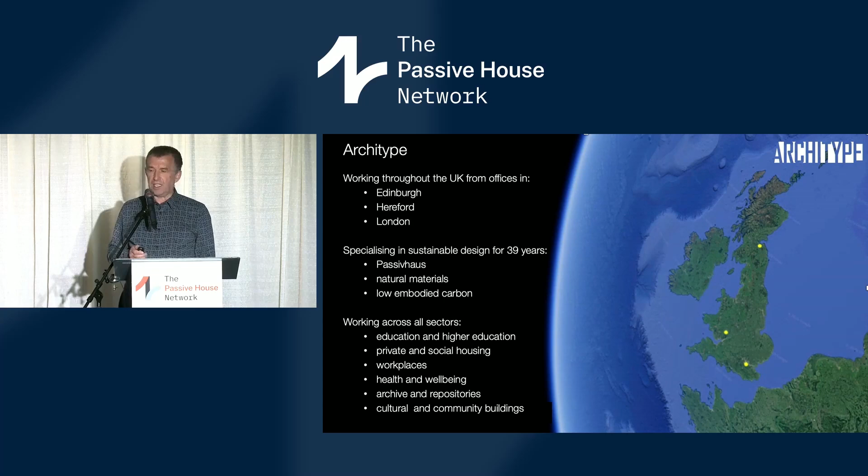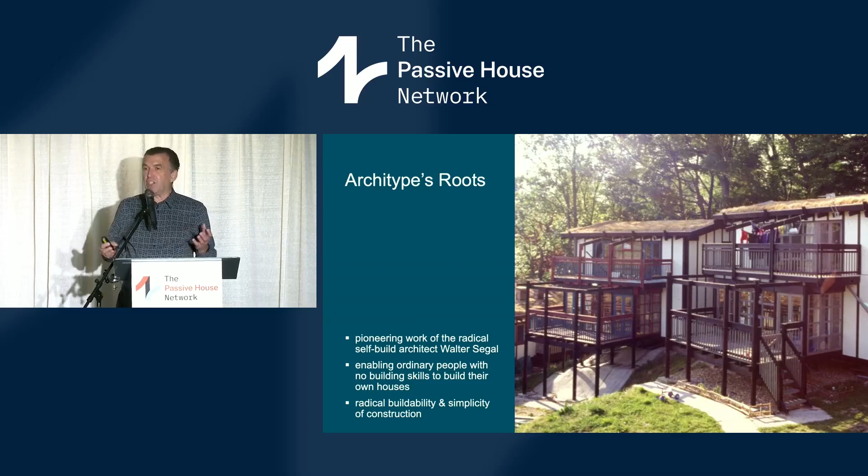So I'm going to take you back to the roots of Architype. We actually grew out of the pioneering work of the Swiss architect Walter Segal, who developed a really radical way of building, which enabled ordinary people to build their own houses without any previous building skills. And it was that sort of buildability and simplicity of construction which I think has underpinned everything that Architype's done and has enabled us to achieve Passive House at sort of economic costs. And I'll talk more about buildability and simplicity.

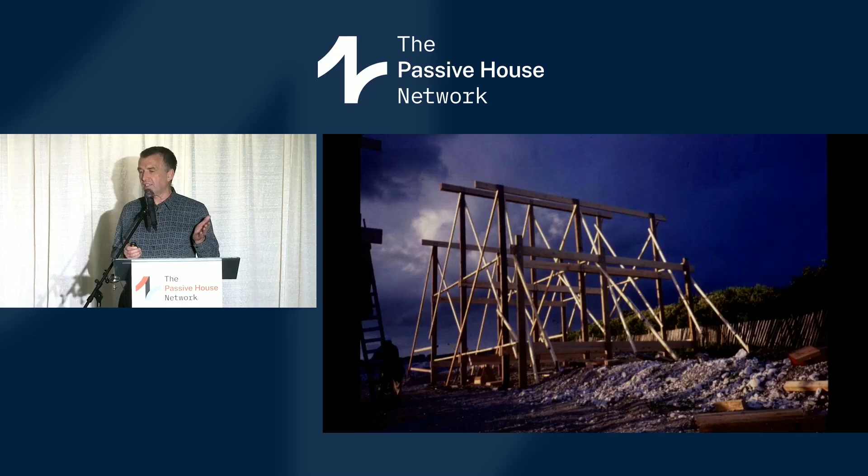But it was a really radical, simple way of building where if you can learn to measure, drill and cut and put a bit of effort into it, then you can build your own house as a group of people. Really inspiring for me as a young architect in the early days of Architype to be working with people self-building their own houses to incredible quality and standards.

And for me as a young architect, it was a really humbling experience to realise that you couldn't just do a drawing and pass it to a builder and expect it to be done right. And if it wasn't, you couldn't just tell them to redo it, because the self-builder would turn around and say, well, I don't understand your drawing, show me what to do. And you realised you really had to begin to understand not just what you wanted, but really how it could be built.

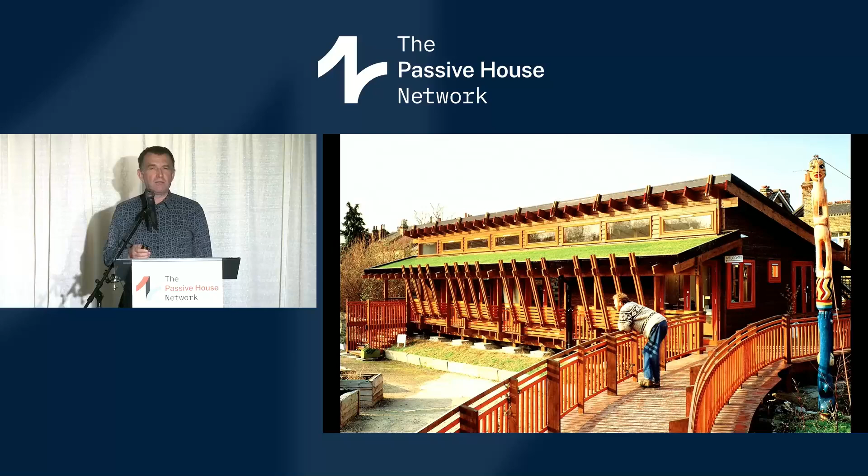Then one of my very first buildings in 1991 was this little visitor centre for a wildlife organisation in London. And they wanted a Segal-type timber construction. They had a very, very tight, small budget, and they wanted a building to be as sustainable as it possibly could. And I'm really grateful to them because it forced us to think really hard about what we could spend the money on.

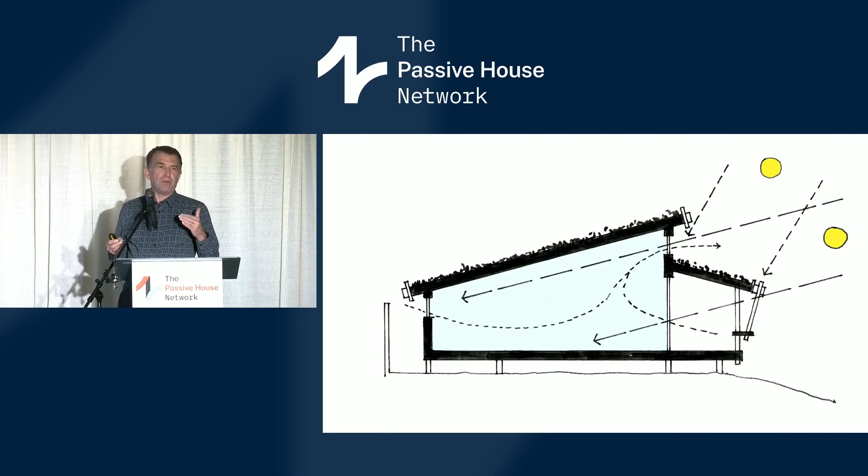Keep the building really simple, make the shape and the form and the orientation of the building do all the hard work to moderate its climate without the need for complicated M&E systems and all the kit that was normally put into buildings. So we had a very simple building with a roof tipped up to the south, a veranda to shade out the sun that would overheat it, and then very simple natural ventilation where we could open high-level and low-level windows to cool the building in the summer, but gain maximum warmth from the sun in winter when it would be useful. So this was a really, really simple building.

It was the very first building in the UK to use recycled newspaper insulation, using a sort of breathing construction, organic paints imported especially from Germany for the project itself. But most importantly, a really simple shaped building, thinking about its form and orientation, to do all the hard work in environmentally controlling itself. And again, that runs through our approach all the way through.

So I'm next going to show you three key projects that we did between 1995 and 2005, which really took us from where we started through to discovering Passive House and then embracing it.

The first is a building we were asked to design for the Horniman Museum, a really amazing place in South London. They had this old tennis court site next to their museum building where they wanted a demonstration building, called the Centre for Understanding the Environment. They'd seen our Segal buildings like the one I just showed you, and wanted something similar but on a much bigger scale, that could operate automatically without needing people to open and shut windows and all the security that went with that. They wanted it automated, but simple and efficient.

So we took the idea of that post and beam simple timber construction, but scaled it up to a huge scale, where the columns and beams would not only hold up the building but also act as a passive ventilation system, drawing cool air from underneath the building, up and out through the column chimneys at the top. It could all be controlled with a simple building management system.

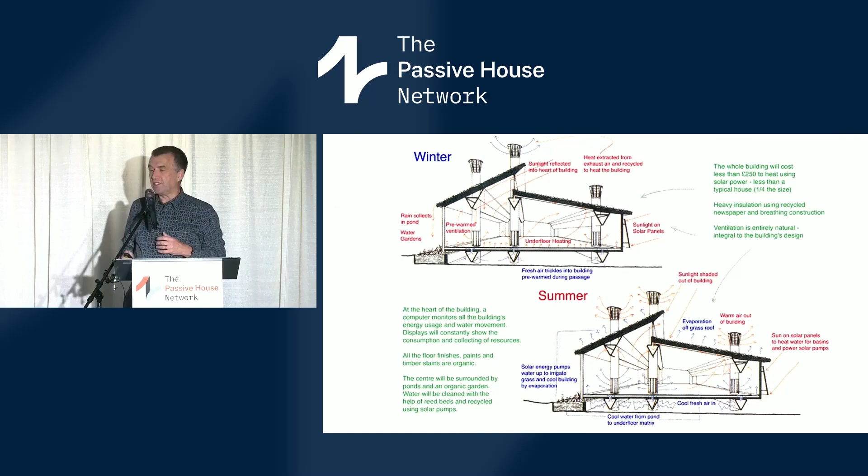The other thing this did was enable us to integrate services with structure and prefabrication, because the building had to be built incredibly quickly, in 8 weeks from when they had the site available to opening. They also wanted a building that could be moved to another site in future, since they saw this as a temporary installation. So we had to design something highly sustainable, quick to build, and movable. We came up with this idea of a big prefabricated structure that also acted as the services. It was probably the most stressful 8 weeks of my life getting this thing built, but we managed it.

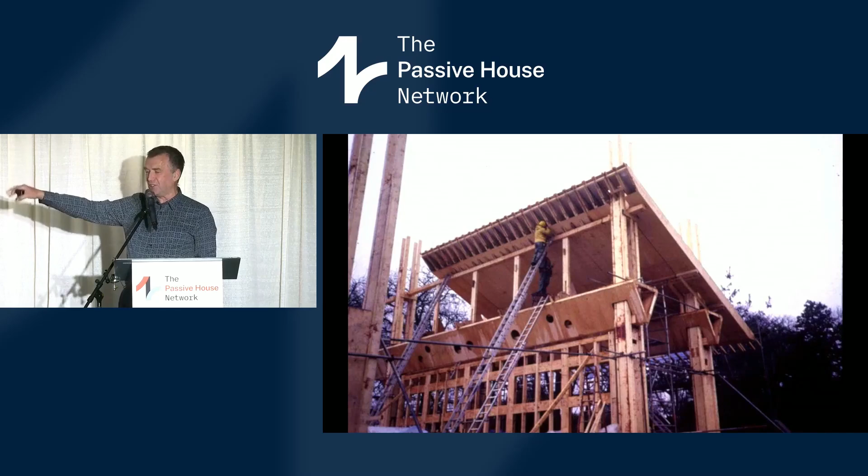Health and safety - don't look at this guy on the top of the ladder there, or the other guy just behind him on a little bench on top. Anyway, there were no accidents in the construction of this building, and it was up and running and opened in 8 weeks. I'm showing it to you because for me it was a really seminal building where we were thinking about form and orientation, but integrating it with structure and services. Nowhere near Passive House - it was definitely a key building on our journey towards it, that type of integrated thinking.

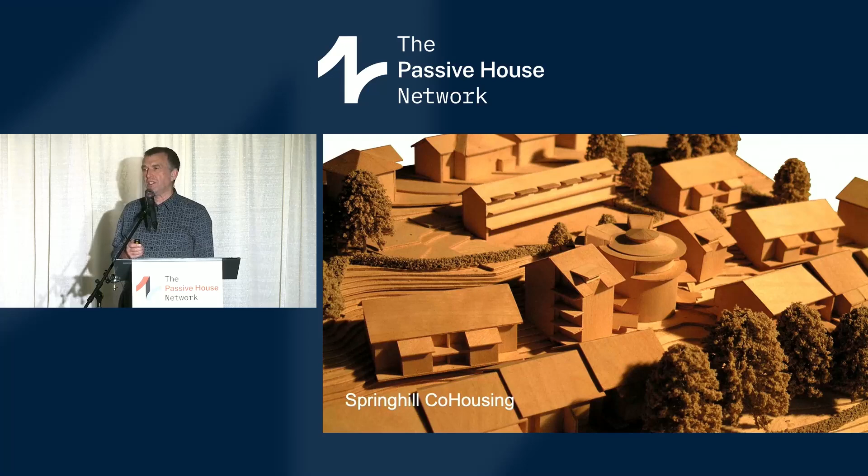The next project is a co-housing scheme, which I'm showing you because it really brings to the fore the social side of our work, the importance of working with communities and taking communities with you. I know there's been quite a few co-housing schemes here in the US, but we discovered it from people in Denmark, where it's very popular. The idea is, rather than a social housing provider building houses to rent, or a developer building houses for sale, the people who are actually going to live on the site form their own development company, employ architects, raise money, and build out the project.

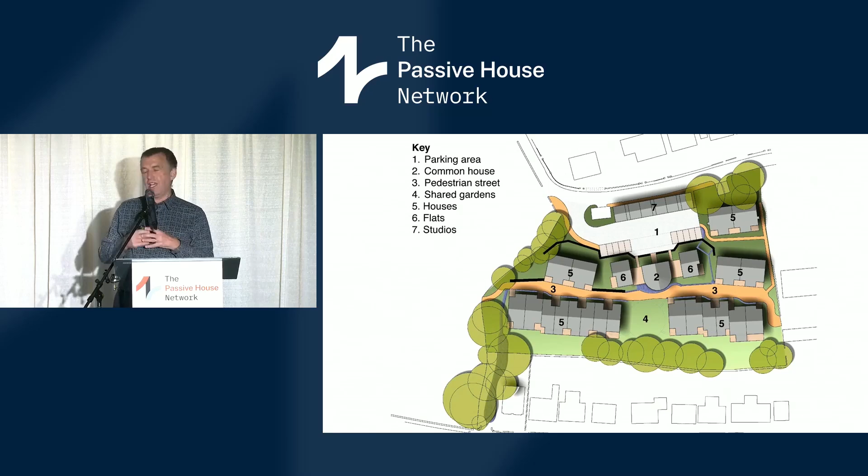What's really interesting is that they demanded high standards of sustainability - they wanted low energy houses. It wasn't about persuading a developer; they were the developer, telling us that's what they wanted. But importantly, they also wanted a scheme that was highly social. So instead of all the houses on separate plots, they wanted shared gardens that they all shared together. They wanted a common house at the heart of the scheme with communal facilities, creating a character of living which is vibrant, with cars kept away from the site.

It's all pedestrian - the children are completely safe and can play anywhere. The gardens have private areas, but they're open communally. They own the whole site as a group, then leasehold their individual houses. It's a remarkable process of working with ordinary people to build a very special place. But the message here is working with communities - when you open up to people, they demand sustainability in a way that politicians, professionals, and developers often don't.

The third key project is St Luke's Primary School, which was a key step in our journey towards Passive House, because here we really focused on improved insulation, getting rid of thermal bridges, improving air tightness, and triple glazed windows. But we were still big believers in natural ventilation, and we didn't like the idea of mechanical ventilation.

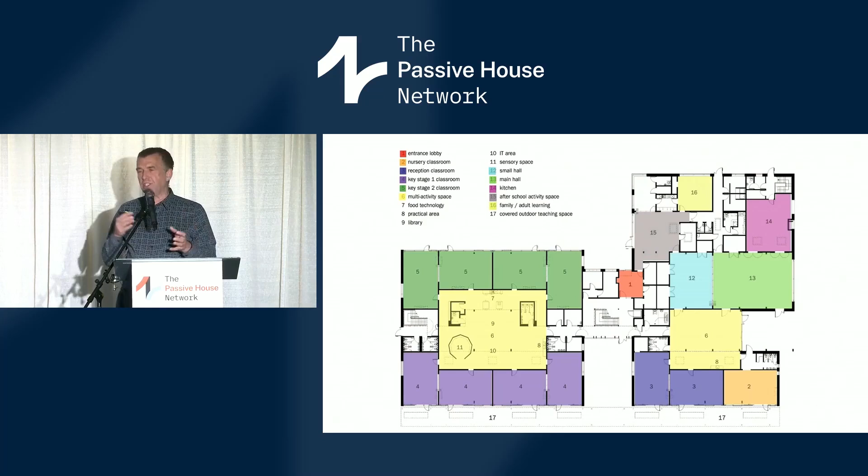But again, it brought together for us the social side and the environmental side, because we rethought what a school is and moved away from corridors and classrooms, creating shared spaces off which classrooms opened. This very much came out of consultation with the school, in a very deprived part of Wolverhampton City, where they wanted to create a place where children could learn and develop.

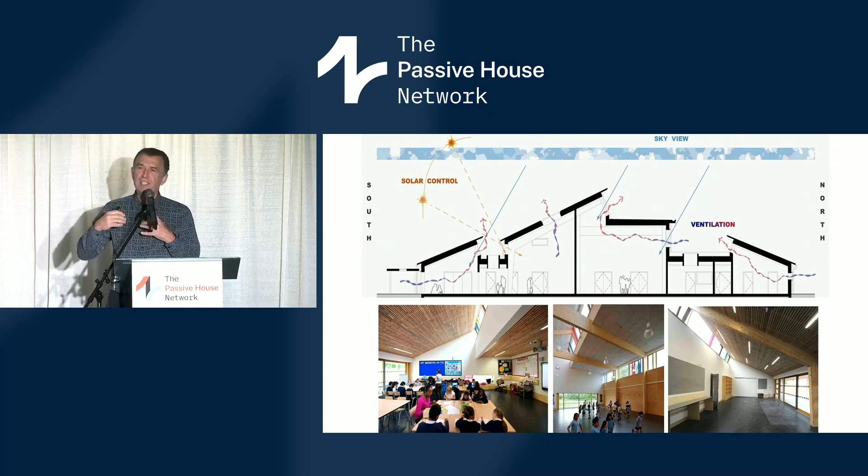To fulfil their potential, not just by sitting in rows in classrooms, but by collaborating in groups and different activities. So we developed a very interesting section running through the entire shape of the building, creating a series of different spaces which would bring daylight into the heart of every space, allow natural ventilation through every space, and bring a school to life, with real focus on the quality of natural materials that children would touch and feel, and the quality of light and air in the building.

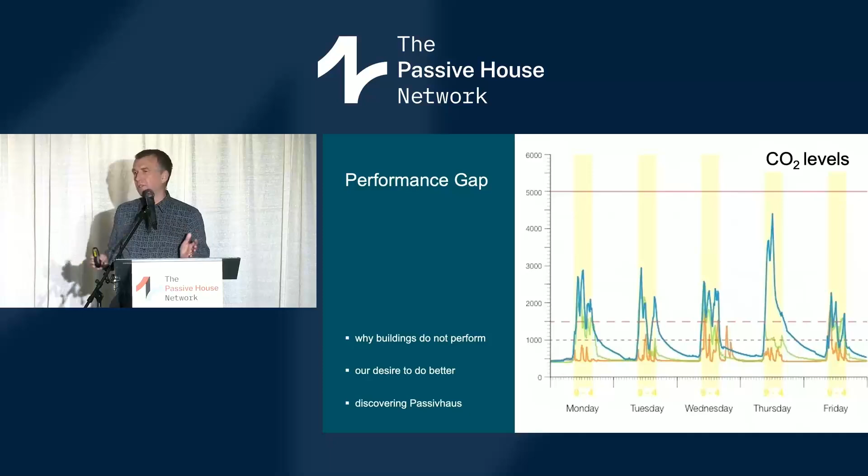It was a very, very successful building in many ways. However, we then did post-occupancy monitoring, and people loved this building, and it works very well, everybody thought, in many ways. But we had heard about the performance gap, and we wanted to test our own buildings rather than just believe that they were good enough.

And when we did this, we were horrified to see the CO2 levels we were getting in the classrooms. The three colours: blue is winter, green is autumn or spring, and orange is summer. In summer it's not too bad, because the windows can be wide open. But in winter we were getting CO2 peaking at 3,000 to 4,000 or 5,000 parts per million, which is truly horrendous. We were horrified to discover this, but actually it's not uncommon, and it's not as bad as some other schools we also monitored, of all ages, new and old, often getting above 5,000. It's extraordinary to realise how bad the air often is in our buildings.

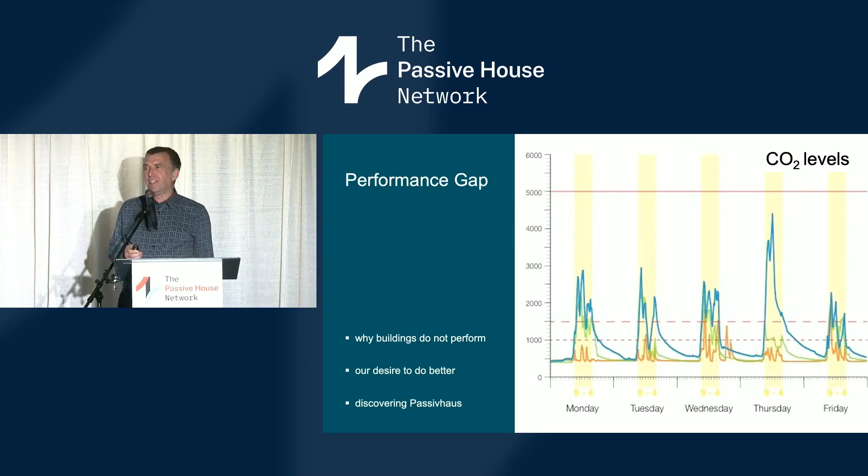So we determined to find a solution, and it coincided with a time when Nick Grant, who some of you know well, one of our close colleagues we work with a lot, had been to the Passive House conference and came back talking to us about this standard. He was very sceptical about it, but discovered it actually worked. We didn't really believe him either, but started to look into it, and the more we looked into it, the more we realised it offered a solution.

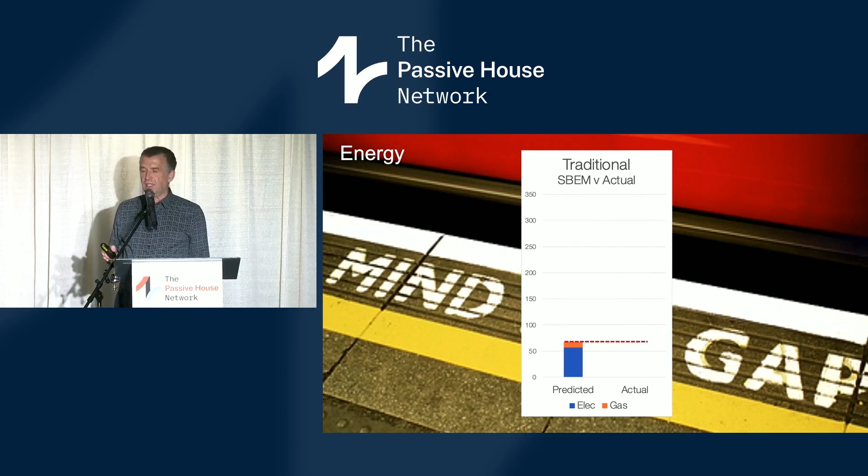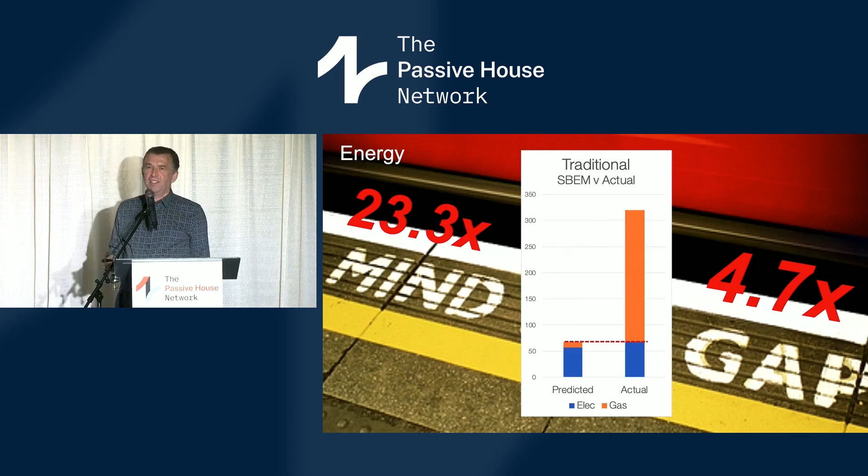When you look at how big the gap in performance is, it's extraordinary. This is data we've used over many years to convince people subsequently about why Passive House. SBEM is the modelling used for building regulations for non-domestic energy predictions in the UK. This is a secondary school in the city of Edinburgh: what they predicted at building code stage versus what was actually measured in reality. An extraordinary 4.7 times as much energy, and the gas 23 times higher. That's just an order of magnitude of error, which is extraordinary, but not uncommon.

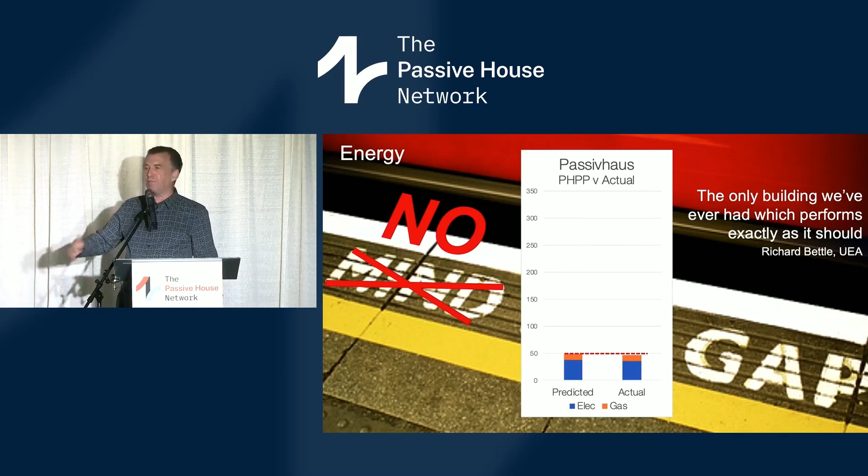Then one of our own Passive House buildings, built years later, predicted in PHPP what was actually achieved, year on year on year. Our client at this building, a university, said this is the only building we've ever had which performs exactly as it should. Surely every client should expect every building to perform as it should. If we bought a new car and it did 10 miles per gallon when it should do 60, or the air conditioning went hot when you wanted it cold, you'd take it back. But buildings do that all the time. It's quite outrageous and scandalous.

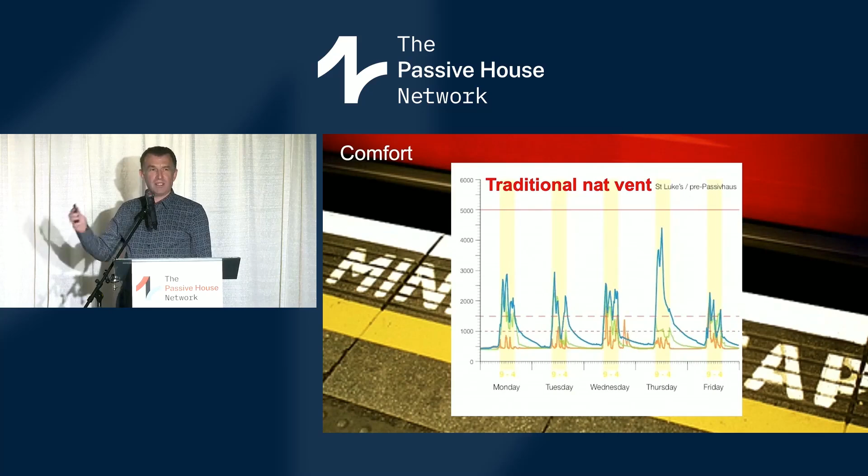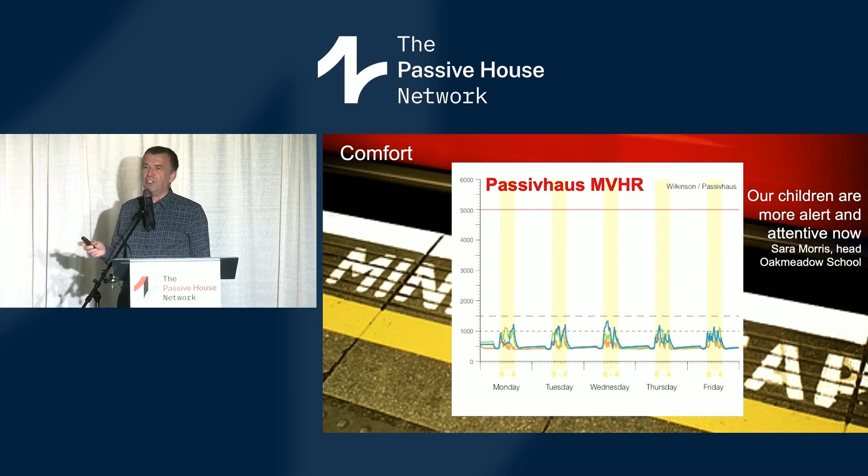Going back to the graph from our primary school, and monitoring a Passive House school we built a few years later next door, you go from that to that in terms of CO2. When the head teacher says our children are more alert and concentrate better, that's what it's all about. Energy is important, of course, but actually it's about children being able to study and concentrate. We can all remember the Friday afternoon English lesson where you struggled to stay awake. You thought it was a boring teacher, it might have been, but it could just as well have been the CO2 was so bad you couldn't possibly stay awake even with the most interesting teacher.

So, Passive House, we quickly became intrigued and converted to the fact that it could offer us a solution to this sort of performance gap that we were horrified to have discovered. I think we were most interested by the fact that it was not just an energy standard, but it was

first and foremost a comfort standard. But underpinning all that being a quality standard, which is what guarantees that it will work. The science is spot on, but the certification and the quality underpinning is really what makes it the difference.

And as an architect, there's nothing else that I've ever had to do in my career where my work is so thoroughly checked externally by an independent person. And then the same for the contractor, to have to gather the evidence is just so different, and it's what

makes it work. So for us, Passive House became something that we knew would guarantee that the building would actually perform as designed. And why, as an architect, would you ever want to design a building which doesn't perform as it's designed? But we do it all the time.

So it's a way of making sure that it does perform. It eliminates the performance gap, which is critical.

It's reducing energy by design rather than, as so many other codes and things do, just offsetting carbon by add-on features and renewables. It's reducing running costs, and in housing, that's reducing fuel poverty, as we call it in the UK.

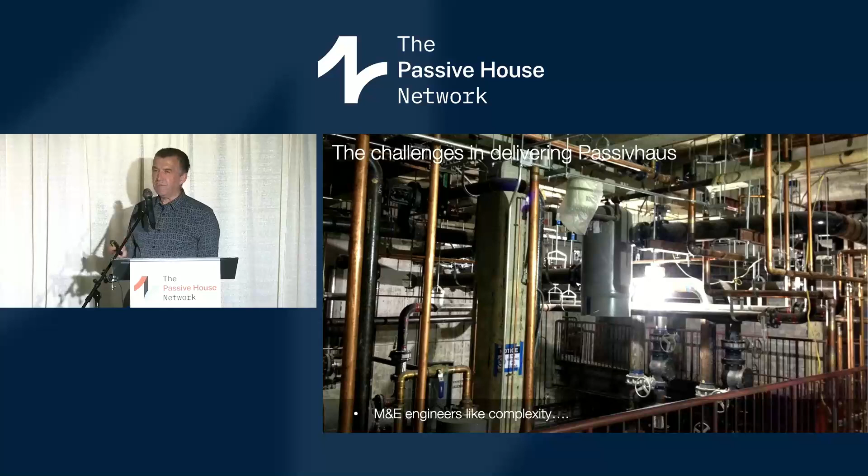And then quantity surveyors, cost consultants, and contractors, they all will price the risk, the perceived risk of something that's new and unknown to them, and you have to overcome that.

So we have to overcome our instincts to design complicated things, and we have to overcome our worry about the risk of something new. But we can do that, and that's what we have to do.

So I love jazz music, and I think this quote from Charlie Mingus really says it all. Making the simple complicated is commonplace. Making the complicated simple, that's creativity.

So making the simple complicated, anybody can do that. Making the complicated simple, that's creativity. And that's what I think we need to do. And that's what Passive House offers us the opportunity to do, encourages us to do that.

So we need to change the culture of how we design. I think too often, I don't know how it works here in the US, but in the UK, design is often a linear process where the architect comes up with a vision, you pass it down the line for the engineer to make it stand up and fix the services, you pass it on to the builder to actually build it. Each person is passing responsibility down the line and not worrying about what's happening.

With Passive House, you have to think in an iterative, cyclical way, so that you think about the form and the orientation, optimize that, develop the facade design and the fabric construction, the MEP services, and then go around again and optimize and refine, and the PHPP helps you do this as you're designing. The whole team needs to work collaboratively together in a cyclical way rather than in a linear way.

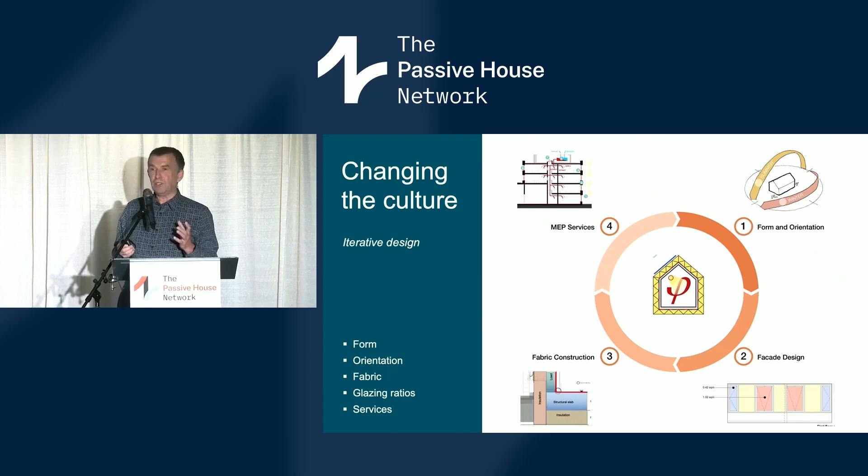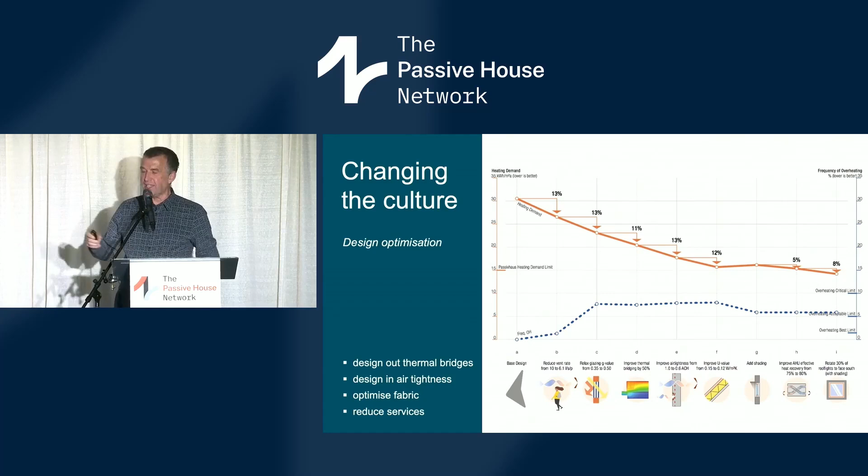As you do that, you start to create a building which is going to work, which is cost effective, and is buildable. You're using the PHPP, as I'm sure you're all aware, to gradually bring the heating demand down from your first effort, which might have been at 30, change this, change that, tweak that, and you gradually get it down to under 15 kilowatt hours per square metre. And at the same time, you're working hard to keep the overheating below limits.

So that's what you do. I'm just going to take you through projects that have helped our business go from our first Passive House in 2012, 10 years later, to 80% of our work is Passive House or Enerphit.

So these are the very first buildings, the schools we did. The client had a standard budget and said, you can do Passive House if you want. They didn't ask for it, we suggested it, but as long as you do it within the budget, and we achieved that. They could see how well it worked, and they came back to us 3 years later and said, our budget's reduced, can you now do a Passive House for a reduced budget? And we did, but with no compromise to the quality of the architecture.

We then did this building for the University of East Anglia, which combined achieving Passive House with BREEAM Outstanding and a really big focus on reducing carbon with thatch cladding and timber construction. It's been open now for 7 years, and every single year its energy has been under 15 kilowatt hours, spot on, performing exactly as it should.

This was the first Passive House secondary school in the UK. It's a much bigger scale building for us, and quite challenging in terms of the complexity of what's required in a secondary school. But again, we managed to achieve this, and a building which does not compromise, I think, on architectural quality by being Passive House at all. In fact, quite the opposite, achieving, in terms of total energy consumption, a 69% reduction on typical benchmarks in the UK.

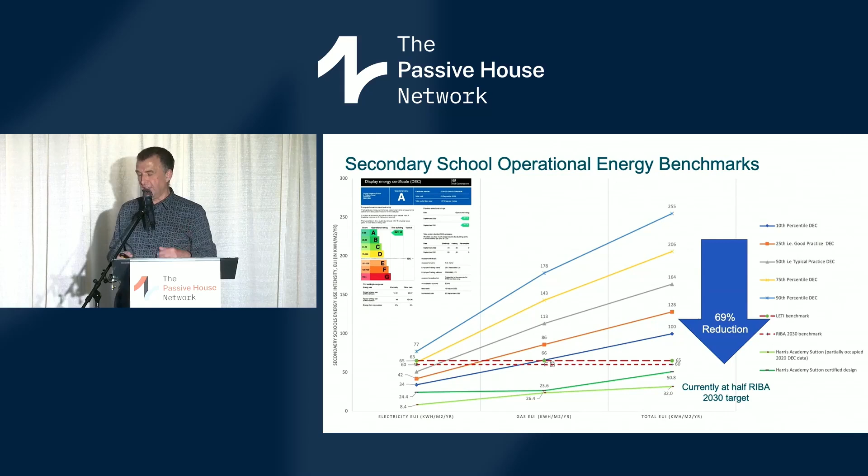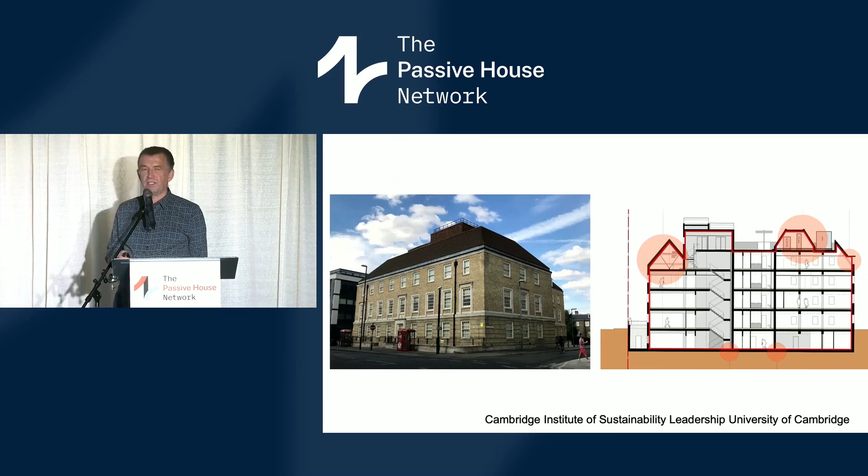That's overall energy consumption. And then we're also now moving into Enerphit. So this is the Cambridge Institute for Sustainability Leadership for the University of Cambridge, an existing 1930s building where they wanted BREEAM Outstanding, Well Gold, Enerphit, and every standard they could possibly think of.

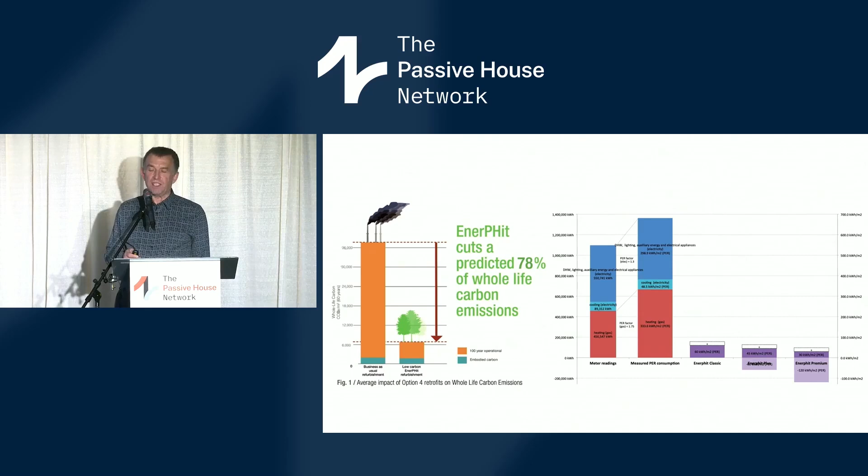It was quite a challenging building to do, but we modeled different options and actually got doing the building to EnerPHit achieving a 78% whole life carbon emissions reduction from business as usual. One of the really interesting things here was the windows, typical sash windows, which are really difficult to make energy efficient, but actually cut out a huge amount of daylight.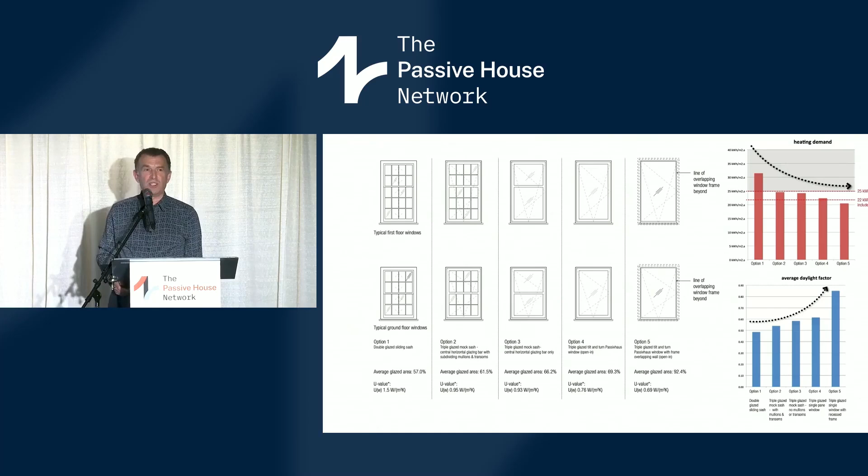So we managed to work very hard to persuade the planning conservation officers, it's a very sensitive architectural area, Cambridge, to go for fully frameless glazing, which was hard work. So you need to dream big and persuade hard. But the big impact there was obviously saving energy, but improving daylight massively. I think the finished building looks really cool having those very, very simple windows set back in the facade there, and the quality of spaces we managed to achieve inside, very good too.

So the next stage in our development was opening an office in Scotland. We didn't do that because Scotland was some passive house mecca, there was very little passive house happening. But we could see there was potential there with the very ambitious targets that Scottish Government were setting for climate policy, really more ambitious than the rest of the UK.

And I then moved there and started talking to people and worked with the Scottish Futures Trust to fund schools in Scotland to develop a mechanism which set an EUI target for all energy and tied it to funding, so that for a local authority to get funding to build a new school in Scotland, you now have to achieve this target every year for 25 years, and you get your funding as a revenue payment each year over 25 years.

So overnight, it meant that any local authority in Scotland wanting to get funding from the government to build a school needed to achieve this. Now, they could achieve it any way they wanted, but actually, we could tell them that passive house would guarantee that they would achieve this, because we'd expect a passive house school to come in at about 50-something, safely, well under that metric.

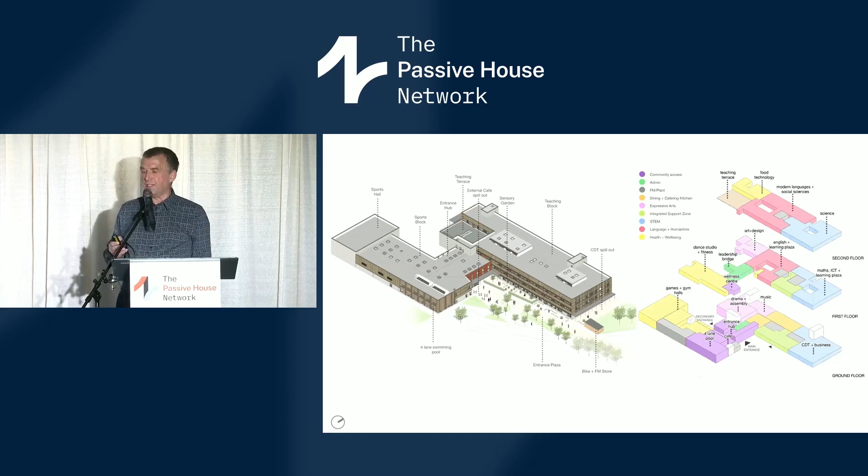It's a big high school, which typically in Scotland also includes lots of community facilities. So it's quite a complex building, a big school of this size, but also has a library and a swimming pool and lots of complexity of layout. And yeah, there's not time to go into all the metrics, but we've got an overall form factor of 1.7. And you can see afterwards all the different levels of insulation and glazing ratios and heating demand.

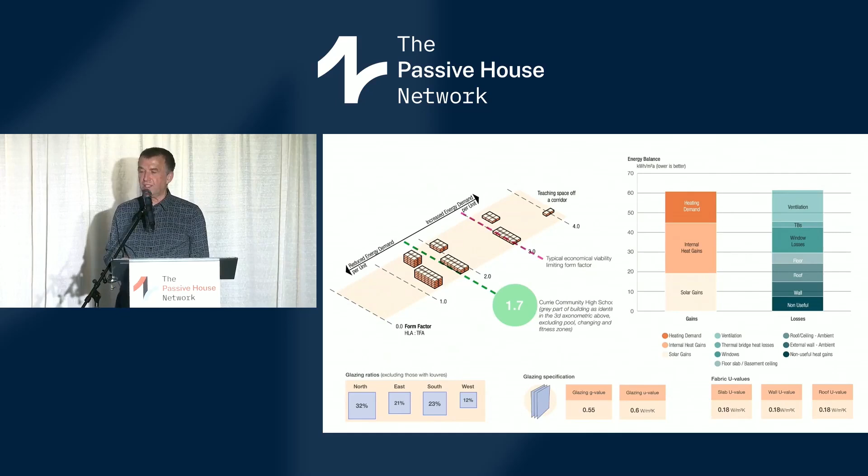And it's currently on site. It's a big steel frame building. Now, steel frame is really, really challenging to do passive house. And this was an example of us having to respond to the market, which builds schools in steel frame. We just couldn't persuade anybody to do it in timber or in concrete. It just doesn't happen in the UK. Everything for schools pretty much is steel frame, although we have got a swimming pool in CLT, solid timber construction.

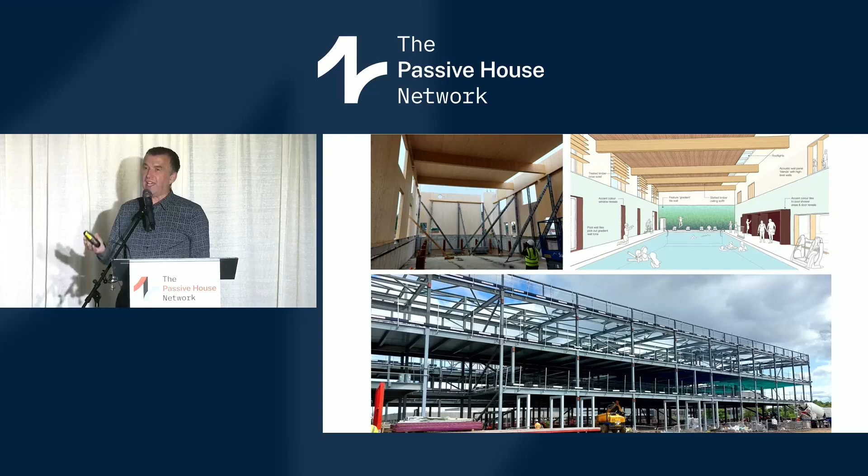But the first building I showed you was steel frame, and we managed to get the airtightness down to 0.5 something, which people said would be impossible, but it just shows that passive house is construction blind. You can build it with anything, and that's one of the great things about it, even steel frame.

And then finally, City of Edinburgh came to us and said, well, actually, deciding to do all our schools passive house, that was the easy bit. What about the hundreds of buildings we've already got? How do we tackle them? And we said to them, well, adopt the same rigor, model them using PHPP, and use PHPP to guide you as to how you could retrofit that building.

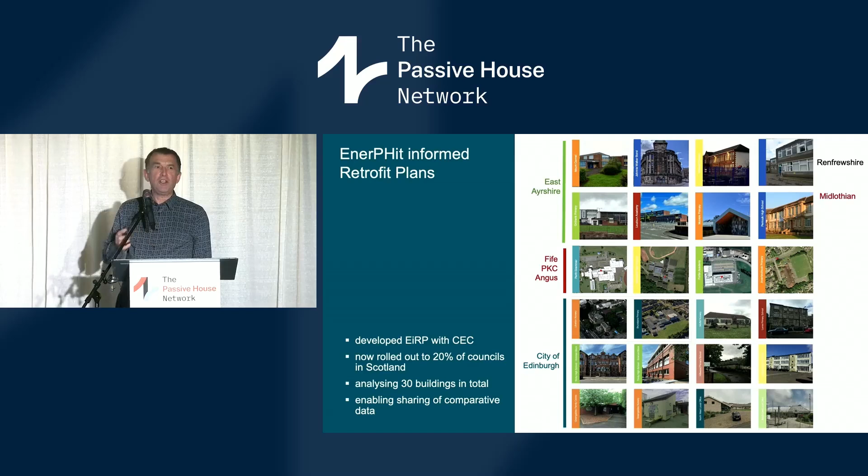It may not be, in all likelihood, that you'll be able to afford to do every building, but understand the building by analysing rigorously using PHPP, and then use that PHPP to model different scenarios, different levels of intervention. And so we've now done 12 buildings for the City of Edinburgh and extrapolated that across their entire estate of 300. We've now done about 30 buildings for a fifth of all the local authorities in Scotland.

It's a huge body of data, all using PHPP. They're all sharing data with each other, and they can all use that to make informed decisions about how to retrofit a particular building or how to manage and improve the building over time. So if they're changing the windows, they know what to do now and the roof in 5 years' time.

So you can stage over time, or you can retrofit now to whatever standard you think is right in terms of cost, carbon and energy, but strong in the knowledge that your analysis is rigorous because you're using PHPP. So we call it the EnerPHit Informed Retrofit Plan, and it's that rigor that we know works that's giving real

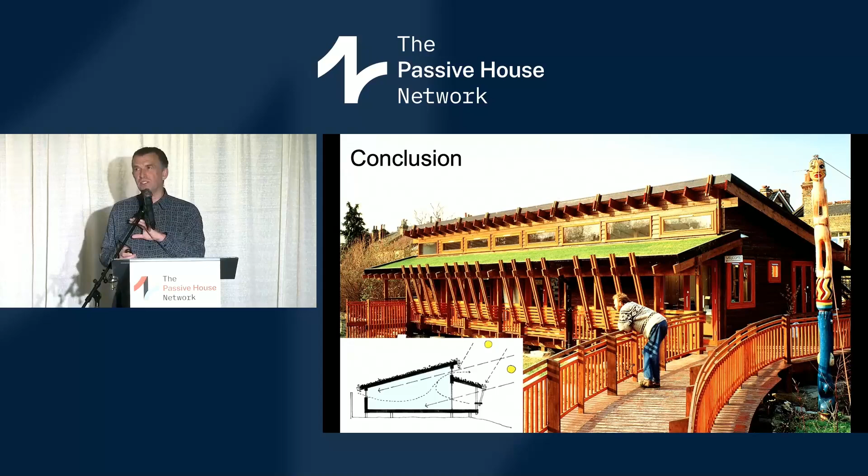credence to this analysis. So, just in conclusion, I showed you one of my first buildings I did, and the thinking that came from that of simplicity, of using the form, helping the building to do all the hard work rather than relying on add-on complexity. And I would encourage you all to think simple. Remember Charlie Mingus's quote. And I just want to show you a couple of other examples of how that thinking of keeping it simple but dreaming big has helped us to do some interesting things.

So we were asked to do a new archive and record centre. So this is a building that keeps very precious archive material that could be hundreds of years old at very constant temperature and humidity in order to preserve it. And typically these buildings are rammed full of kit, trying to close control temperature and humidity to keep it stable, inevitably failing because one thing goes wrong and everything goes out of kilter, and then temperature, humidity, one or the other or both goes haywire and the materials get damaged.

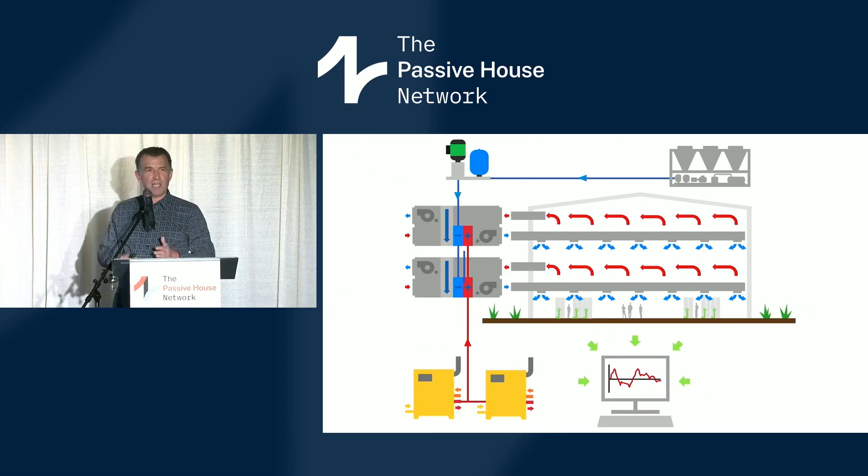So we proposed, let's do it as a passive house. Make a very, very simple box, airtight, well insulated, and reduce the kit down to the very, very minimum you possibly need just to keep temperature, humidity. This is not full of people. They go in there occasionally to access the archives, so you don't need the same levels of air as you would in an occupied building.

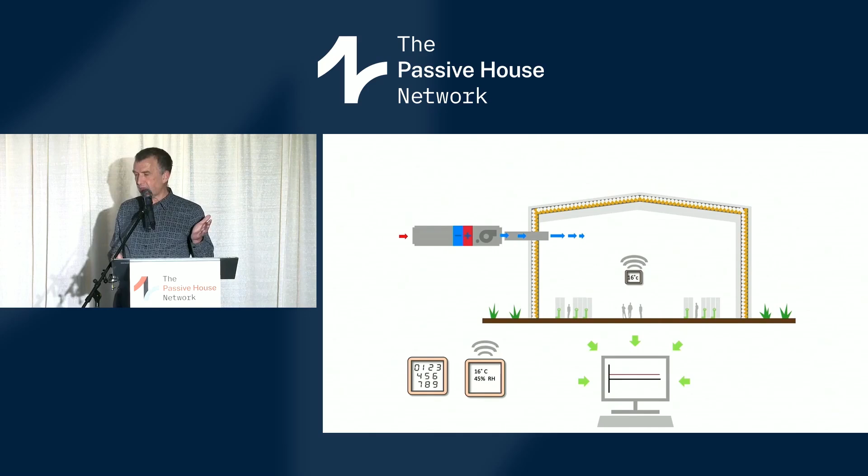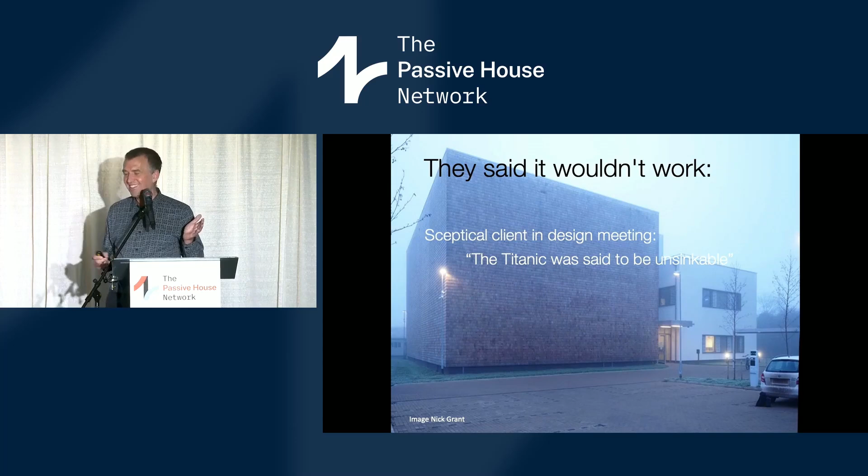Now, when we were designing it, we were arguing that this would work, and our service engineer said it'll never work, you need to have all this kit. The client was kind of convinced but was worried, and at one meeting the client said to us, are you sure this is going to work? We're investing a lot of money here. And our colleague Alan Clark, who some of you also know, quickly said, "Don't worry, we're designing an iceberg."

And we persuaded them, we got rid of the M&E engineers because they were too sceptical, got new engineers in, kept with the client's confidence and built the building. And the proof is in the pudding, because if you're an archivist, this really is the most exciting graph you'll ever see.

Now, one of the things that I found interesting over the years is we've had a lot of criticism, skepticism from the architectural community that Passive House makes you design boring boxes. You know, it's all very well, all this stuff you're talking about, but your buildings are quite boxy, they're not really architecture. But hopefully you've seen from what I've showed you that I think that's wrong, and I hope you do too.

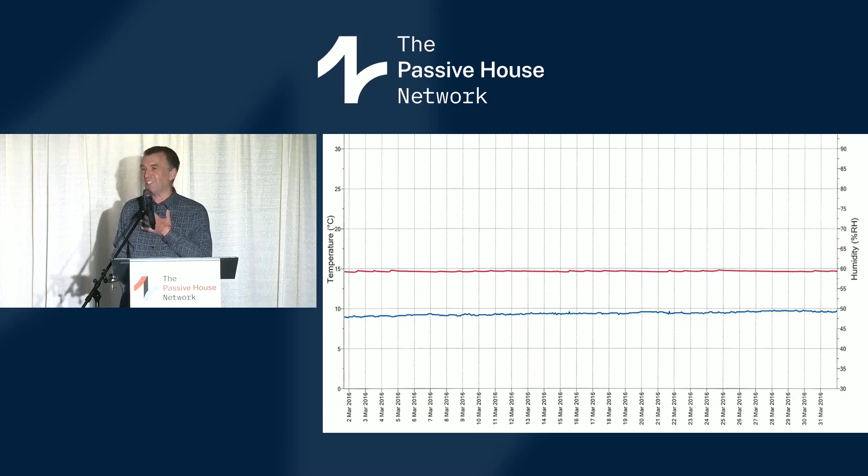But ironically, when we designed this building, which really is a box, which is another archive building for the Imperial War Museum, it's an amazing site, but we just created a really, really simple box. In the architectural press, we suddenly got lauded for finally finding an architectural language that matched our sustainability credentials. And we're thinking, you've been telling us we designed boxes, now we designed a box, and you're telling us we've created architecture. So.

But what's great about this building, again, it's for very, very precious archives for the Imperial War Museum. It's 5,000 cubic meters of building, which I think is 180,000 cubic feet. And that is the M&E that it has in it. One package chiller, one cooling coil, one domestic size MVHR, and 9 domestic vents. And it's creating a building with phenomenally low energy consumption and phenomenally stable, that horizontal graph, which everyone is really excited about.

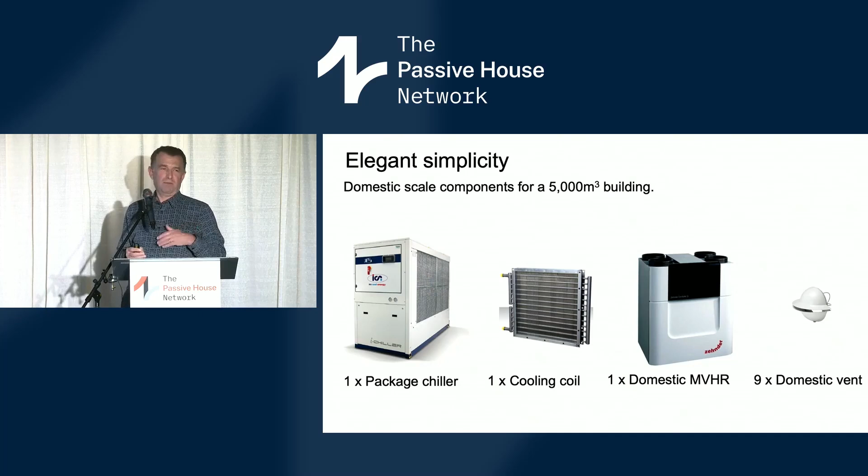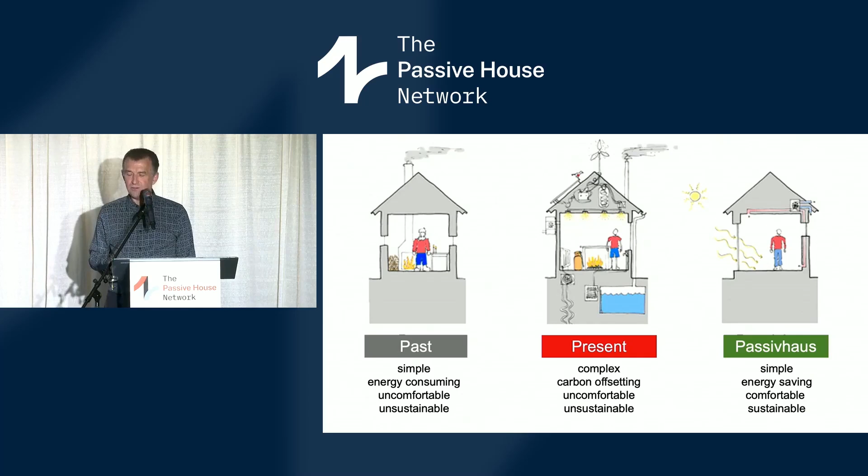So dream big, always challenge your fellow peers, your consultants, your clients. Challenge them to dream big, but keep it simple. So this little diagram, I think in the past, buildings were very simple. Windows you could open, little coal fire, but they were energy consuming, uncomfortable and unsustainable. In the present day, we've got obsessed with complexity of systems, of shape and form, of using carbon offsetting to fool ourselves that we're achieving sustainability.

Passive House offers simplicity, a much simpler way of building, which is energy saving by design, which is comfortable by design, and ultimately, therefore, is truly sustainable.